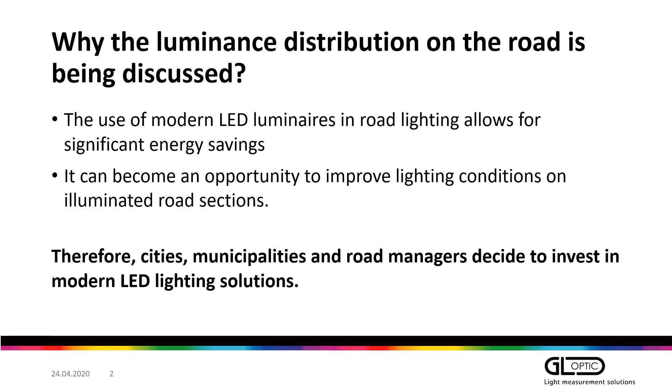And this is also an opportunity to improve lighting conditions on the roads where the lamps or luminaires are replaced with new ones. In any case, these are the major objectives, and that's why cities and local governments, municipalities are investing in modern LED lighting. We know, on the other hand, that there are some questions or some hesitations how to control the quality of this installation.

And we know that there is a lot of work which is done usually before the investment stage. So initially, when there is a design stage and the specification for tender, a lot of people are involved in the process, and there is a lot of effort put in this initial stage. Unfortunately, when the installation is ready, the compliance testing, or the control whether the actual installation is conforming to the design requirements or the standards, is not very often made. Usually the quality control of the installation is done quickly.

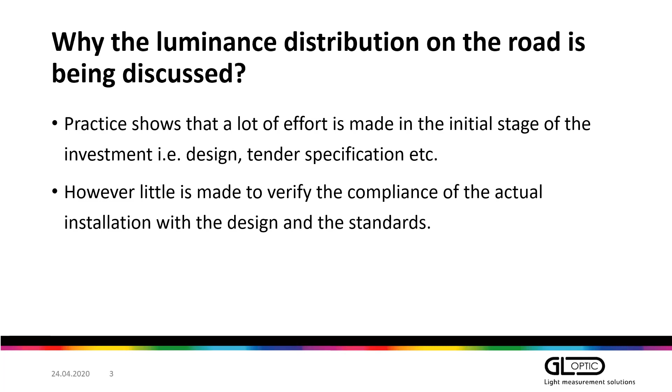Sometimes it's only a matter of inspecting the number of luminaires and the paperwork, but performance parameters are very seldom controlled on site. There are reasons for this, and this is part of this discussion that we are facing now, why people are not checking quality on site, and if there are ways to improve it, and what are the tools that we can use for that.

Sometimes also the quality of the new installation is not what local citizens are expecting. Sometimes LED lighting is just criticized only because it's new, and we have limited possibilities to verify this in some kind of unbiased way. So in this presentation, I would like to share some experiences and also tell you more about the available tools. And also we will discuss what are the standards that we can use to verify this in this unbiased way.

We have an existing road lighting standard in Europe. The recent publication was in 2016, and it is consisting of 5 parts. There are guidelines where we can find important information about the selection of lighting classes. And this is important because we have to use these lighting classes for the design stage. So the designer is deciding how many luminaires of what kind are going to be used with a specific distribution to meet the requirements of the standard.

But the same lighting classes are then influencing the methods to verify the quality of the installation. The second part is describing performance requirements. Then we have calculation methods described. And in part 4, we have methods of measuring lighting performance, and this is corresponding to the lighting class that was selected by the designer, basically. And then last but not least, the energy performance indicators. The major drive for LED luminaires on the roads is the energy saving, so we have to pay attention to this last part as well.

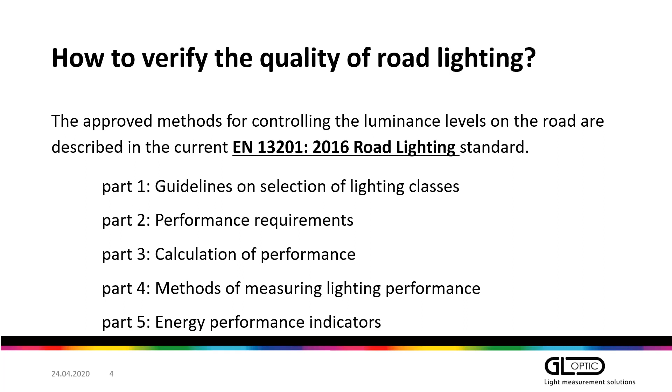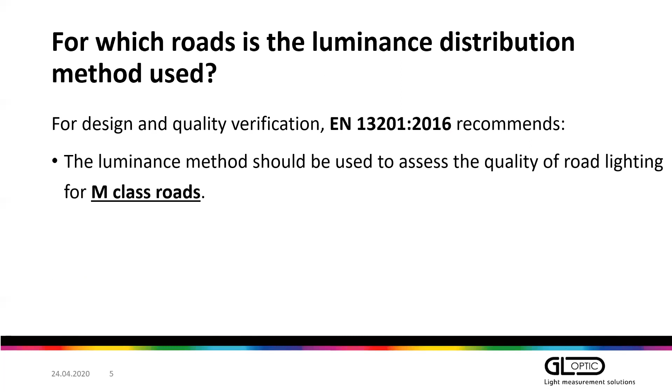In my presentation, I'm going to focus on lighting classes selection and also methods how to measure the lighting performance. So we have to consider which roads we can verify with the use of luminance distribution method. And this standard clearly indicates how we should handle that. So for the design as well as for quality verification, so for the measurement stage, we should be focusing on luminance method for M-class roads.

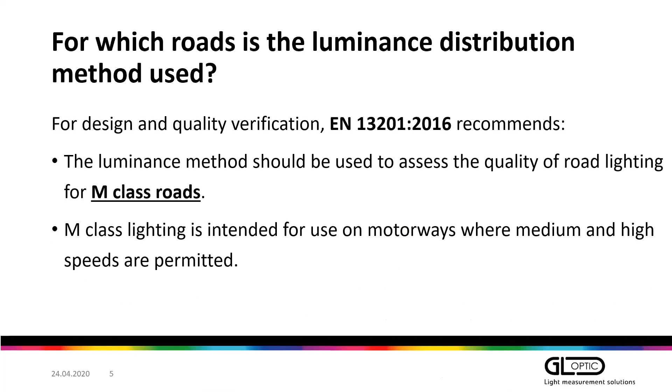M stands for motorways. So obviously we are talking about the roads with medium and high speeds. This is connected with performance characteristics and also visual perception of the driver. On the roads where we have medium or high speeds, we need basically more light. So the luminance level requirements are higher for M-class roads.

Now that we know how to select the road classes, which is directly indicated in the standard, now we can discuss how to perform the measurements correctly. Because in the standard, we have a table indicating luminance levels. So we have 6 road classes. And for each class, we have average luminance and the uniformity of luminance indicated. In the standard, you can find also methods how to calculate these uniformity factors.

Then going down, we have slower and slower speeds, let's say. So we have lower and lower luminance levels indicated in the standards, and these are minimum luminance levels that we have to meet.

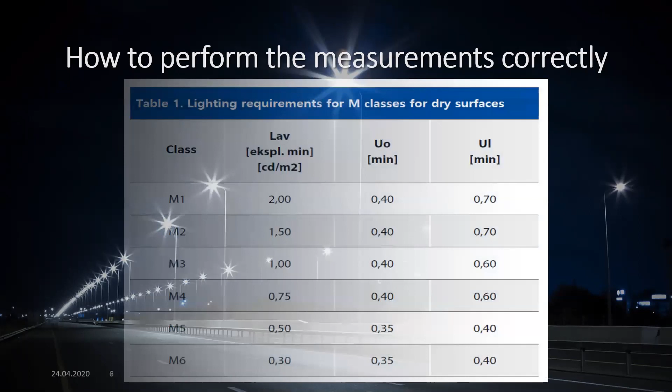So as you can see, for each driving lane, we have an area of a lot of points in a specific location and distance from each other. And this allows us to check the luminance level and also check the luminance uniformity.

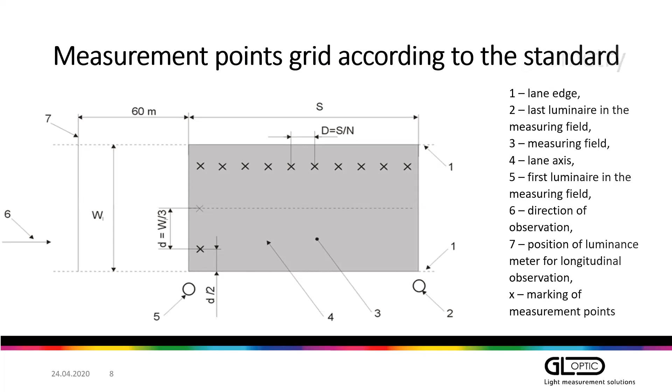Positioning of the meter is also very critical in this case, because the luminance meter should be placed at the height of 1.5 meter above the road level. This is equivalent to the sight level of the eye of the driving person, because luminance is used here as a performance parameter to check how we can observe the road surface and whether the driver is able to see the objects on the road properly or not.

So the luminance is an important quantity here, because we are talking about the observation of the road luminance, as if the driver was seeing the same measurement in the same area. The average luminance should be measured for the whole roadway for each position. So if you have a 3-lane road, you need to position your measurement device 3 times in different locations. And for each position, you have to make the measurements of the whole road.

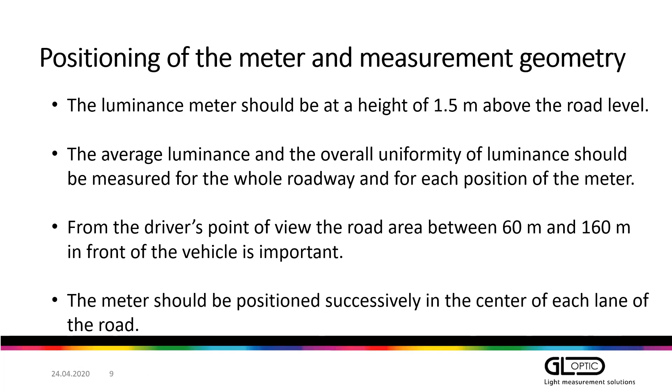From the driver's perspective, the area between 60 and 160 meters in front of the vehicle is important. So you can imagine that this is quite a large distance that we are observing, and the same distance should be observed by the measurement device. So the meter should be positioned in each center of the lane, one by one.

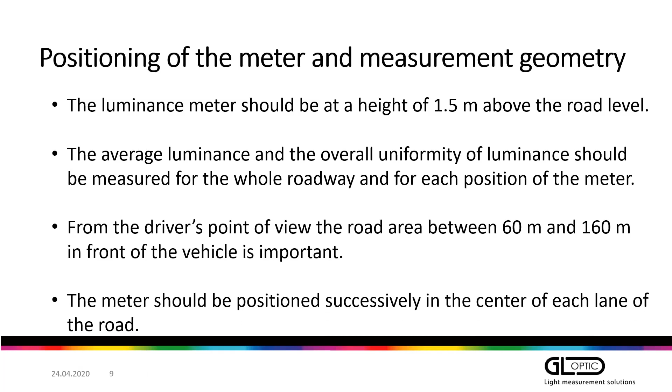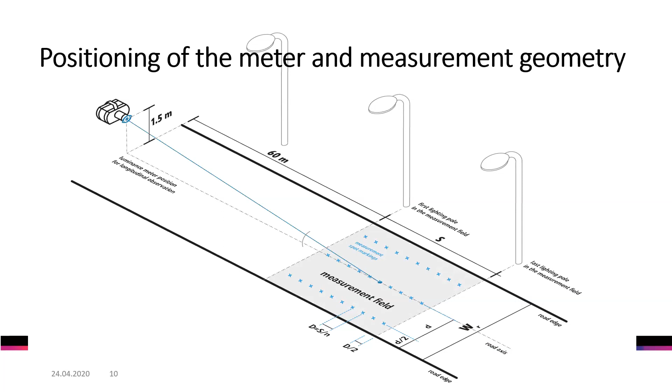As you can see, the grid of measurement points is located according to the standard, and this is for 1 lane only. But this is just a nice looking picture or drawing. In reality, from the driver's perspective, the measurement points density is increasing because we are quite far from this area.

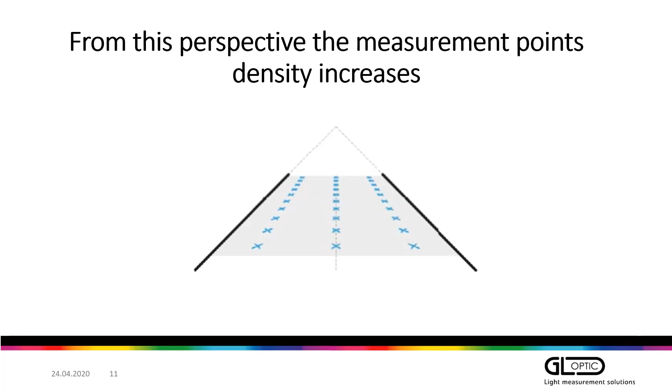So in fact, if we are supposed to measure each point individually, one by one, this task becomes very difficult. And this is where we are discussing the first biggest obstacle to making more measurements on the road, because how to do that is the biggest question. There is a very large number of measurement points. This is required to check the luminance uniformity. This is becoming a very difficult task.

Some of the points may be overlapping at a larger distance, and the targeting or positioning of the meter is a very challenging task. So this was the trigger for our project together with Poznań University of Technology to design and eventually come up with an advanced but easy to use luminance meter to promote more measurements on the road and to allow more stakeholders to verify the performance of the lighting on the road.

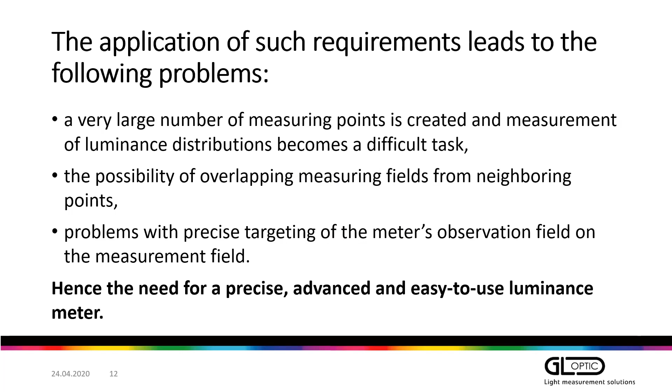The project was developed and co-financed by the European Union, in the framework of the National Center for Research and Development. And we selected Poznań University of Technology to partner with us in this project because they have long-lasting experience in road luminance measurements. And they also have a lot of experience using different types of luminance measuring devices. In the project, a new model of an imaging luminance measurement device has been developed.

The research and development and industrial research stage was in partnership with the University of Technology. So we had a chance to verify our engineering work against their scientific knowledge in this field. And this allowed us to come up with a new design and a completely new approach to the luminance measuring devices.

Obviously, we are using a luminance measuring device, so an imaging system, which has been existing on the market for a number of years. But the important point is to have it modified to the specific task on the road. The majority of existing systems are laboratory equipment, and they are just carried out on the road to make measurements.

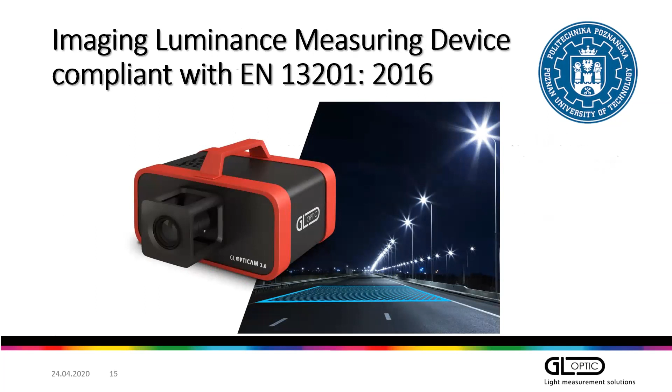The device itself is prepared for work outside. So this is a completely different approach than the typical laboratory instrumentation. So there is a waterproof housing. There is an additional power source which can be used on the road because obviously it's field work. So this has to be quite a self-contained system.

The sensor is stabilized thermally using a Peltier cooling system to allow for precise measurement regardless of the conditions outside, because Europe is quite large and there are countries measuring during summer, there are countries measuring during fierce winter conditions, and we are talking about absolute luminance levels. So this was a critical part of the project, to deliver a thermally stabilized system.

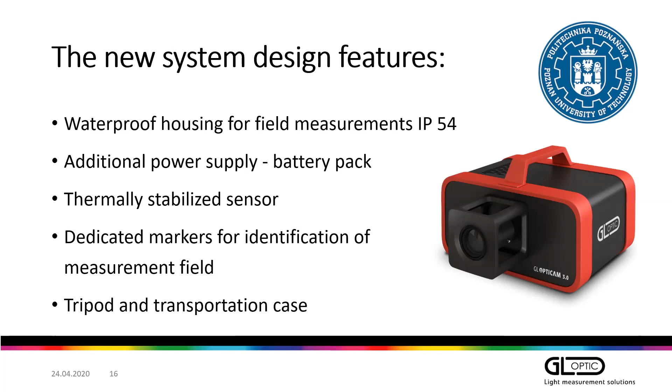There are also peripheral devices like markers to indicate the measurement field, and a tripod and transportation case so that you can carry it outside without the risk of damaging the equipment. So the system features the imaging luminance measuring device, a typical field application tripod. There is also a measurement wheel to measure distances and locate the measurement

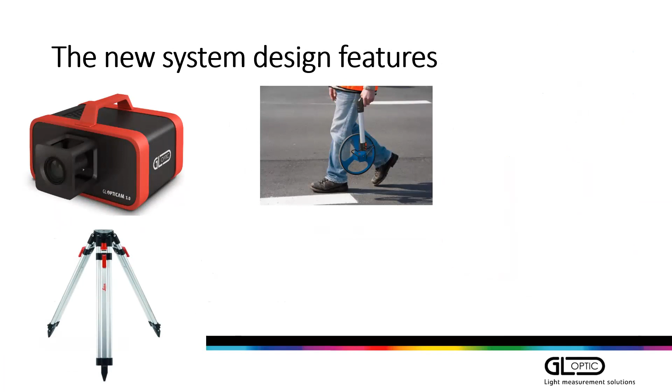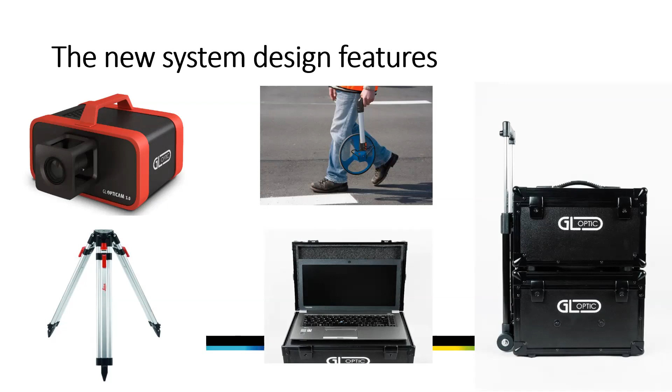field precisely. There is a transportation case, and last but not least, there is a dedicated laptop with software supporting the measurement process. Now, coming back to the requirements, we are supposed to check the luminance levels depending on the class, but to do that, we have to make this number of measurements. So how this new system is helping you to do that is shown now in the next slides.

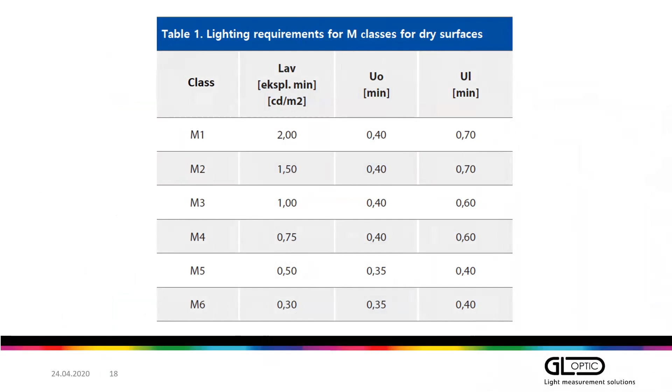The dedicated software is allowing you to capture the field according to the standard. So as you can see, from the perspective required by the standard, the measurement field view is very specific and it's quite small. So the software is going to help us to change the viewing angle to have like a helicopter view on the measurement field to help us to position the measurement points.

And then the measurement points are applied automatically by the software in the measurement field which is required. So as you can see, there is a significant number of points in this instance, and for each point we are measuring the luminance level, and this is also helping us to make a calculation of luminance uniformity.

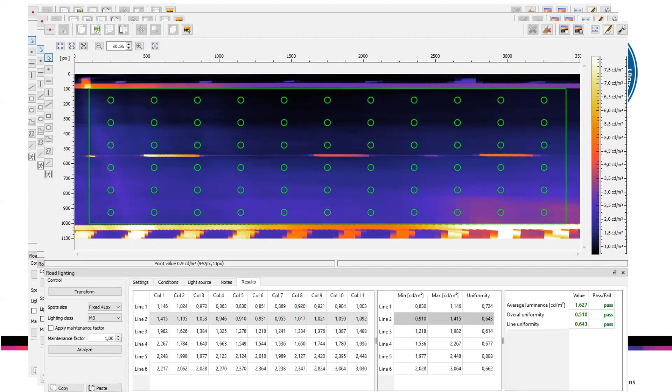As you can see here, there are 3 lines, so there are 3 lines for each driving lane, and a specific number of columns depending on the size of the measurement field. And in each position of this matrix, you can see the luminance readings. These are actual calibrated data obtained from the luminance measurement.

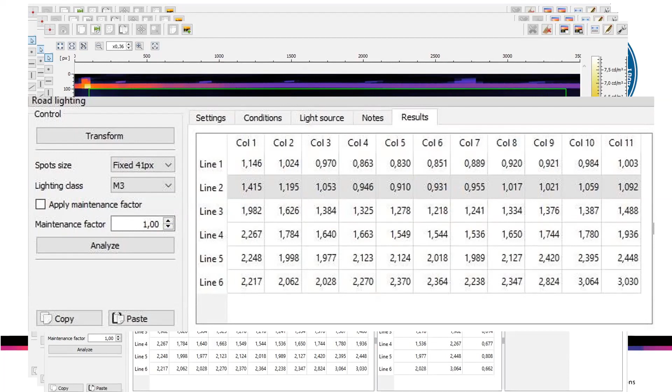Using this, applying the minimum and maximum luminance levels and the uniformity required for the specific road class, we can check quickly whether the average luminance, overall uniformity, and line uniformity is meeting the requirement of the standard. So at the end of the day, when we have the measurement made, the software is helping us to calculate the values and automatically confirm this according to the standard.

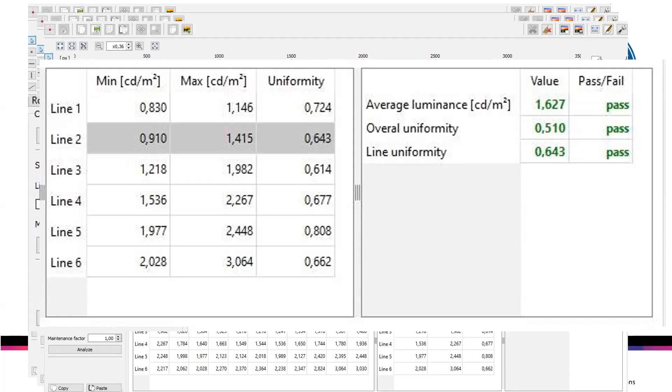So what we have learned today is that the road lighting quality verification can be done according to the European road lighting standard, and using the luminance method is allowed for M-class roads. On-site measurements should be made more often to allow us to check the quality of installation and also check the maintenance parameters of the lighting installation.

And eventually we can say that after 2 years of this project together with Poznań University of Technology, we are sure that the imaging luminance measuring devices are simplifying significantly the measurement process, and hopefully this will increase the light quality control on the illuminated roads in Europe.